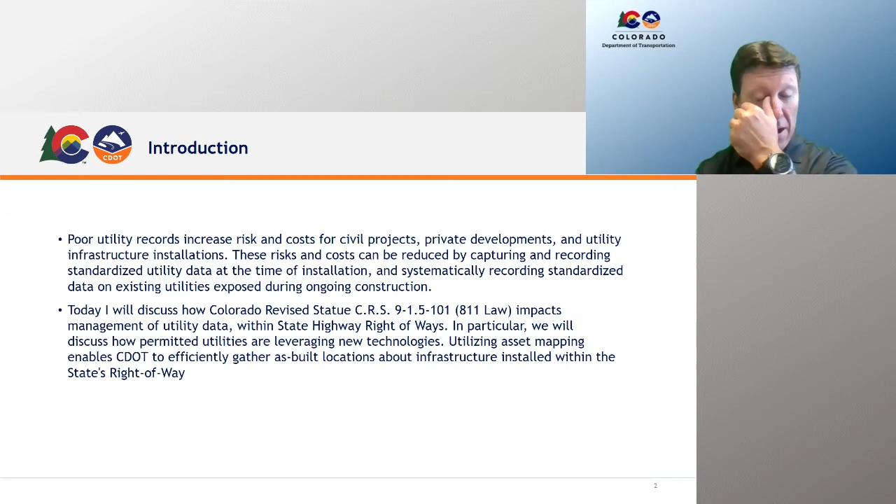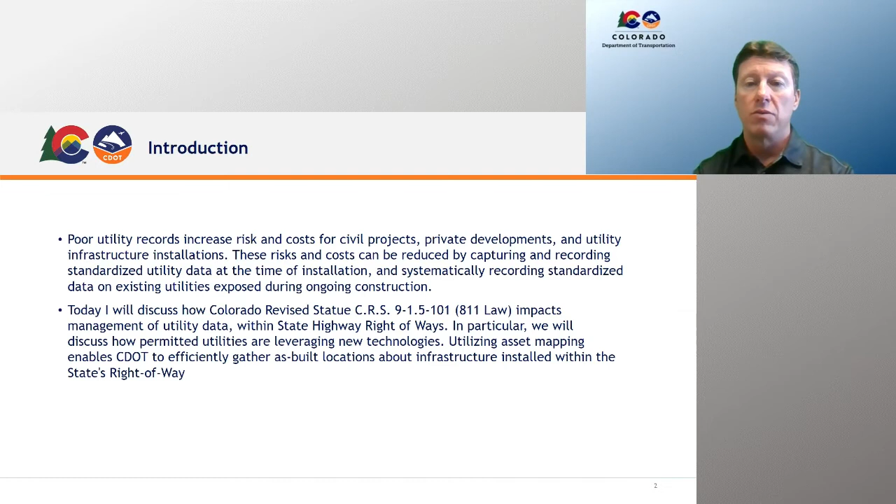Some of this is tied to our legislation that was passed in 2018. I'll talk high level about what our 811 law impacts - it does impact the utility data and how we manage basically the subsurface utilities and the records as we move forward with our state highway rights of way. I'll get into obviously what we're doing and how we're tied to this entire deliverable for utilities.

The goal here is to identify what our limits are and the expectations for our utility companies and permittees pulling permits, where they cross in and out of our right of way, what's expected. We'll go through some examples of what CDOT has put together for those requirements and mandates we now have for utility companies.

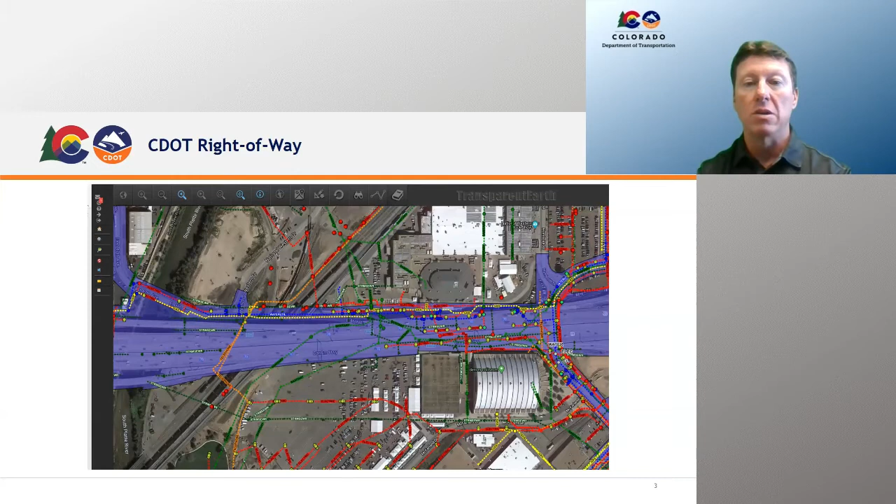So we look at that Transparent Earth PointMan package for CDOT as a good solution because of how we operate with a lot of the legacy systems we have, and trying to find a solution or build one.

We looked at building one internally, and it was really cost prohibitive, and the time it would take to develop an internal process, hardware, and workflow was going to be much heavier lift than what we could take on. So that's why we looked at off-the-shelf solutions for Colorado.

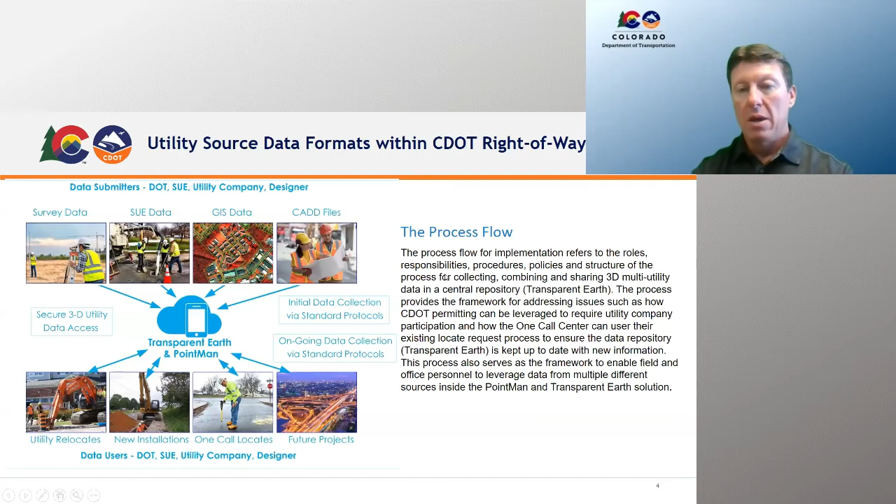When you look at Transparent Earth and PointMan for Colorado, we look at it really as a live subsurface utility engineering file: the existing and new utilities, the CAD data, drone imagery, and one call and excavation notifications.

A lot of states can tell you that one call excavation notifications is really a place where we find a lot of discrepancy between one call locates for excavation and the amount of data we've supplied to the contractors in our utility plans for construction.

There are differences there. Our goal with this process is to have a one-to-one relationship where our construction plans and the excavation locates match perfectly. I know that's unicorns and rainbows, but we really want to see that in the end.

We want our records to be that good that when we work on a pre-construction package, the excavator goes out and they're looking at it with the mobile app, or they're putting it in the cab of their excavator, and they can rely on the fact that the paint on the ground is the same as what's being delivered to them electronically.

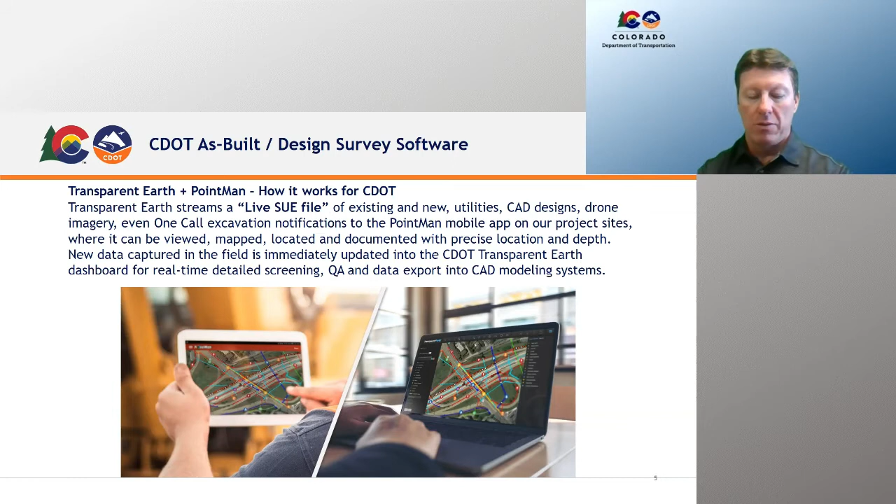It's a heavy lift, but that's the goal, that the records become very, very accurate horizontally and vertically. This is how Colorado is taking this on.

It takes the mobile app, it takes high accuracy GNSS receivers like the Trimble R10, the integration to make it simple enough to use for the non-surveyor, and that's part of the goal.

As a surveyor myself, I know how complicated it can be to survey with all this technology when things aren't working, how to troubleshoot all that stuff. So that's still in here, but the startup, integration, and corrections we were talking about.

With DA1 Trimble receivers and Catalyst correction systems, we want to make that as seamless as possible so that utility companies, their contractors, third-party inspectors, all of these folks working in our right-of-way have access to this technology, and it's user-friendly enough that they can see they should be collecting data at a higher accuracy just based on the simple integration.

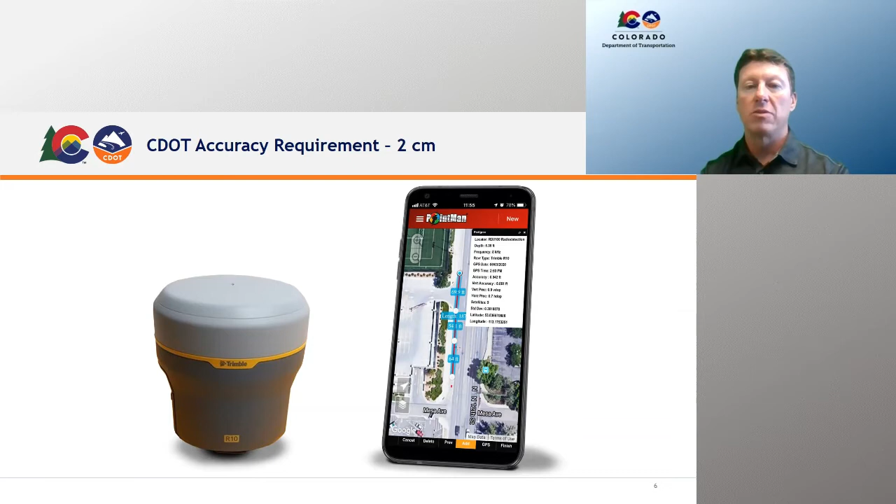We were able to collect the final elevation and grade because there was a little bit of change in the tracks. It actually came up a little bit, so our approach slabs into the concrete panels were rough. We were able to go out and collect down to centimeter level and see how much the pads had changed versus our approach, and then tell our maintenance folks how far the approach paving needed to go back to smooth out that crossing. That's just an as-built on the railroad side of things.

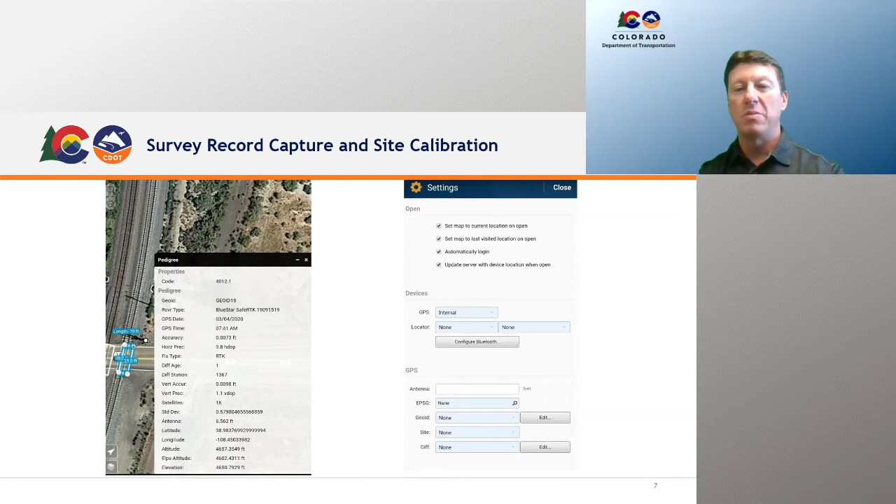So a lot of survey GPS stuff, but this is some of the stuff that we really look to for the GPS or GIS survey kind of hybrid system that I continue to talk about. We're not fully on the GIS side, we're not fully survey, but we're somewhere in this hybrid of survey GPS. It's more like a high accuracy GIS world.

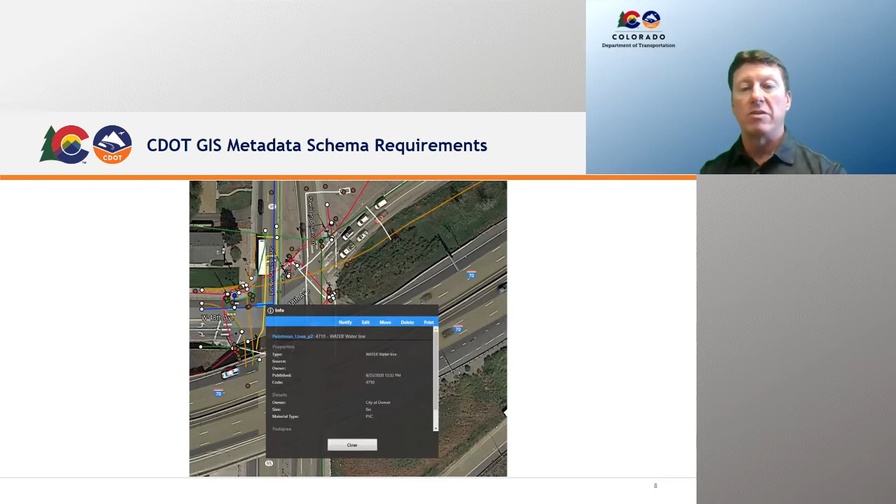So, more than that, we can also bring in shape files into our MicroStation environment for 3D modeling and clash detection, and that's where having northing, easting, and elevation tied to that is important to CDOT.

So with that, that's some of the background on CDOT and what our expectations are, the hardware and software that we've selected: ProStar, their solution with Point Man and Transparent Earth.

So how do we leverage all this within our right of way? We know that we have the tools. We now have to find a way to mandate or train or whatever we're going to do to get this out there so that it's leveraged. And that all starts with the utility permits on our side.

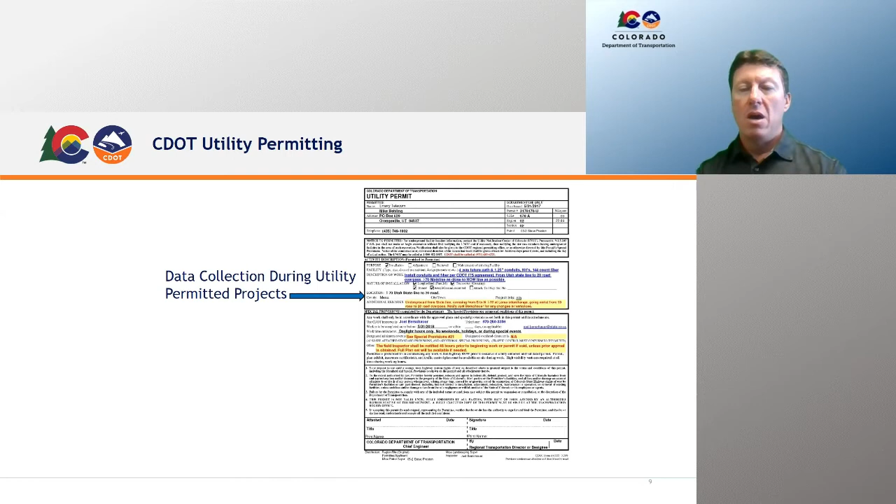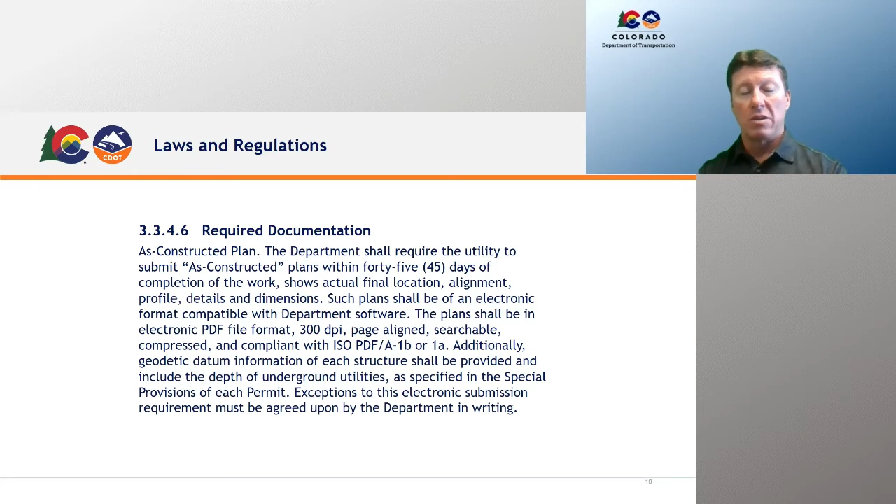Every utility installation within our highway right-of-way starts with the utility permit. So that permit for us means we need to make sure we have required documentation built into our code, that whenever that permit is executed, the contract between CDOT and the utility owner is clear that they are to provide us as-constructed plans, electronic as-built, and what that expectation is. So we have that in our system, in our utility accommodation code, and it's built into our permit terms and conditions and other notifications through the permit. I'll show you some examples of those here in just a second.

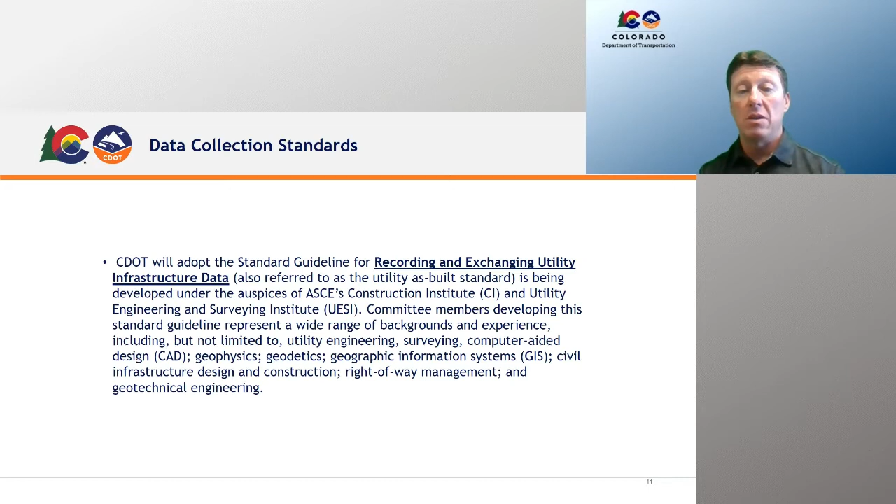One of the other things that's important for CDOT to follow is this new standard coming out of ASCE, the American Society of Civil Engineers, the Construction Institute, and the Utility Engineering and Surveying Institute. They've developed a standard guideline for recording and exchanging utility infrastructure data, or as-installed condition. This document is very important because it standardizes the expectation of what the as-built needs to be and what it needs to look like. There were committee members from a wide range of backgrounds and experience that provided guidance into this document, and I really think it's good information to use.

In our terms and conditions, we provide the expectation to the utility companies and their contractors, or third-party inspectors working on these projects for the utility companies, as to what the expectation is for data collection. For example, on the graph on the left, if it's an HDD installation, we need you to collect the right-of-way line, edge of pavement, and then subsequently the bore log to adjust the surface elevations down to wherever it's taken, probably center of the bore. Same with an auger bore - if you're in the bore pit and the receiving pit, here's the expectation for what we're looking for. That's provided to the permittee.

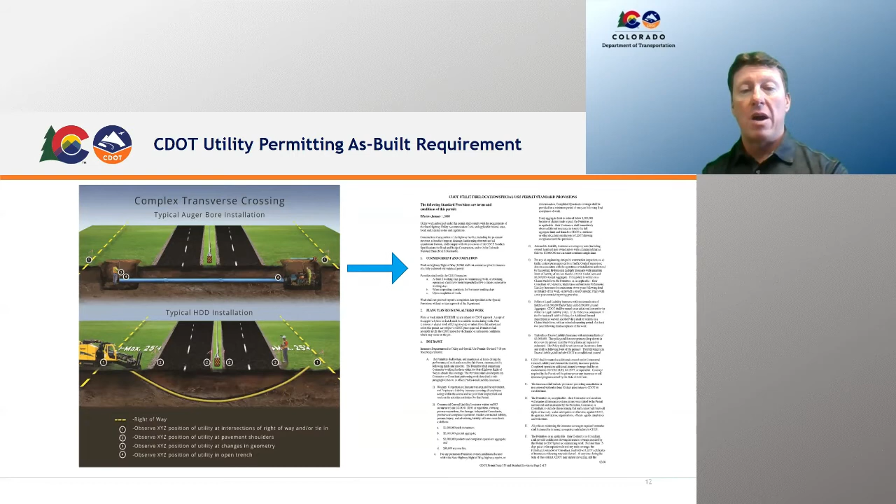This is also part of our as-constructed requirements for the utility companies - the as-constructed requirements for projections and coordinate systems, and positional accuracy specification.

We also provide the list of equipment that we will accept for pairing with the Point Man mobile app. For CDOT, we provide the Point Man mobile app free of charge to those pulling a permit from CDOT. We provide in this as-constructed guidance a link to where they sign up, and a short video showing them how to get started and get logged into the CDOT environment. Once they're signed up and logged in, when they're collecting data in that environment, it all streams through that user ID into our environment, so there's almost zero manual effort needed when it comes to supplying their observations into our database.

What's helpful for us is when we require the personal ID, we can see who it came from. So if, for example, you're an energy company with 6 subcontractors or prime contractors working on a project, all the users using the mobile application need an ID and login. We're up to almost 200 users in our system right now with all these contractors working for the utility companies, which is really important because I can drill down and search through the database in Transparent Earth to see who provided the data, when, and how.

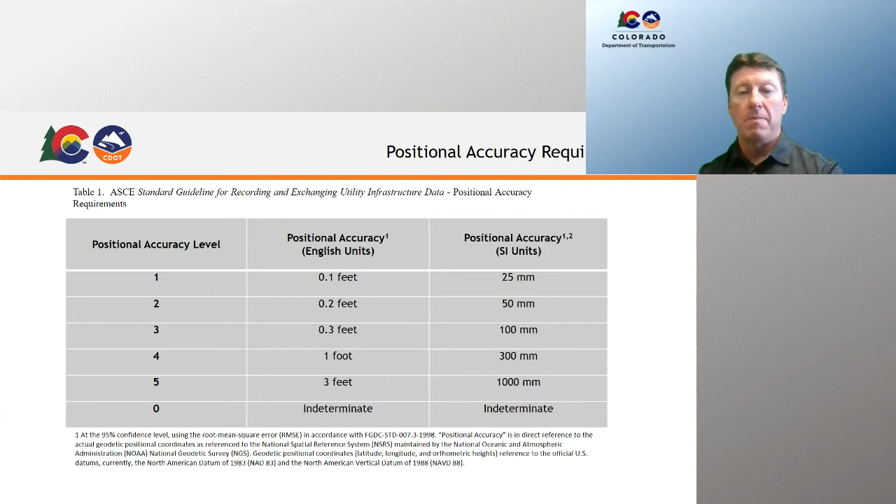2/10 of a foot accuracy for our positions. And what's different in Colorado is we don't require certification by a PE or PLS for our data. Instead, we'd rather see positional accuracy tied to the observation and the survey record generated out of Point Man. Once that's provided, maybe it's a 3 or a 4. We're just looking for the quality of the record in our system, and whether we can use it and leverage it for design later, or do we need to spend money to update that record to a higher level of accuracy. I'll get to why that's important based on our SUE law in just a little bit.

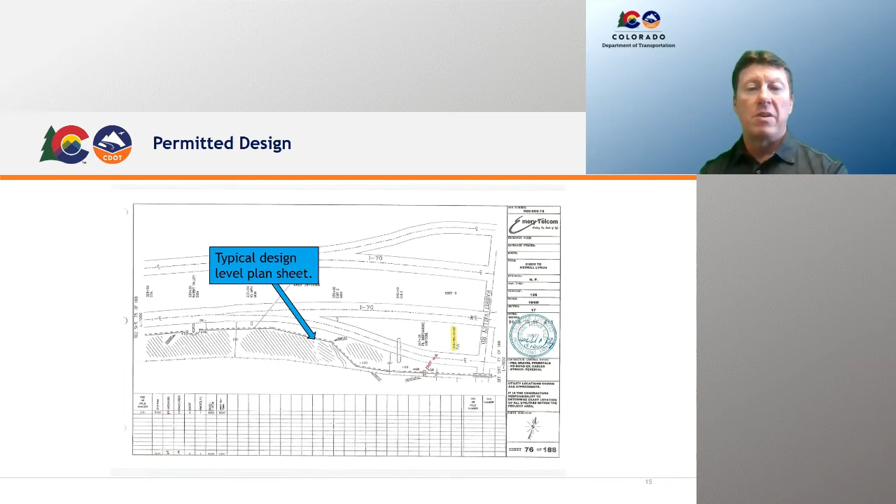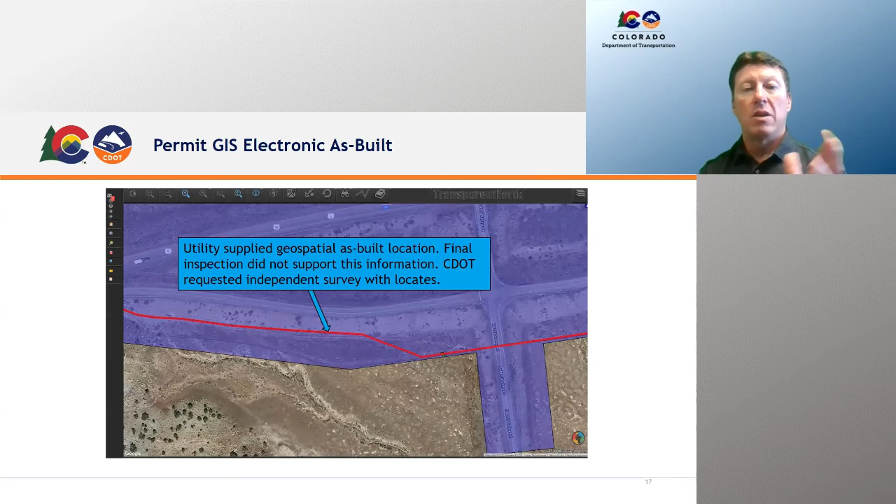When it comes to permitting, this is an example of why we're pushing for more of this data to come in through our new system. Previously a permitted design looked like this - just a simple telecom. They identified where they were going to put this line in our right-of-way, stamped it, certified it, provided us an electronic PDF version, said yep, this is where it's at, we're good with that, and also provided an electronic GIS file - they provided a shape file. The red line is what we were given by the utility company.

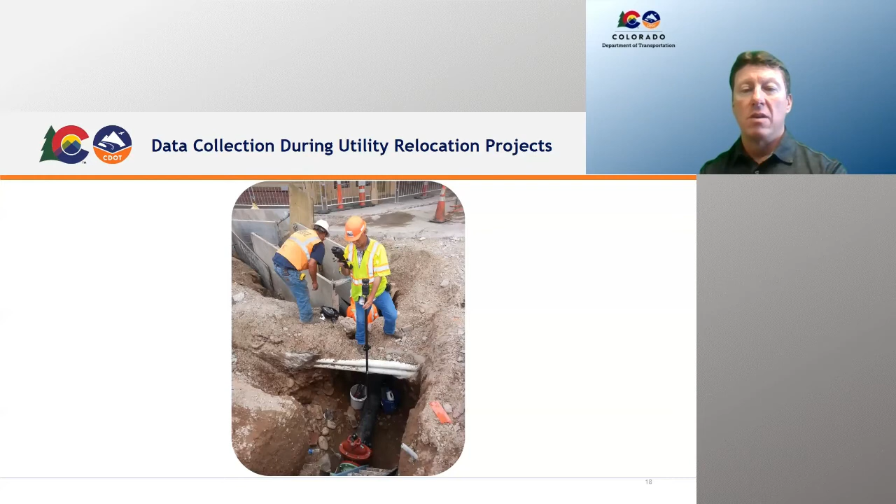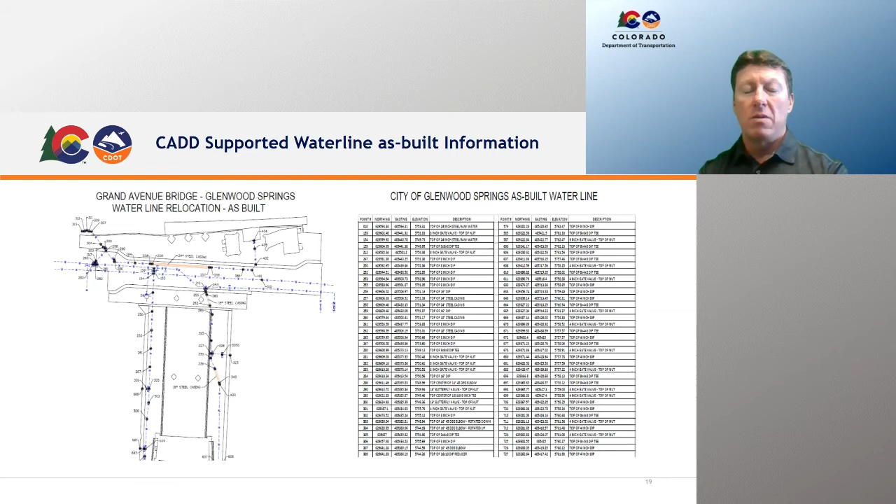And lo and behold, we had some issues with that. Before we'd implemented data collection with an inspector and third-party inspector, we ended up with CAD data that looks like this that never made it into our database, and so we struggled with some of our as-builts in the past.

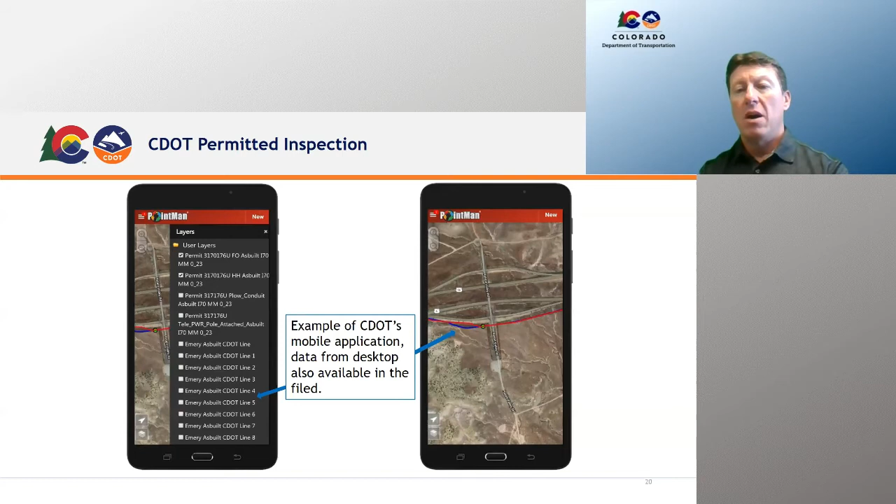So what we've implemented now is our inspectors are out in the field rather than the old method of just the data collector and the survey antenna. It's more interactive now - we're using the mobile app and the GNSS receiver. As you can barely see, there's a blue line showing up that was captured in the field when the CDOT inspector went out. They noticed a different line of disturbance in this area, so they surveyed it in, and questions came up about where it was actually installed. Lo and behold, the blue line is where the telecom company actually physically put the line in the field. It was never conveyed back to the office that it needed to be corrected. So what happened was the designer pushed out the red design, said nothing changed in the field - which everybody knows is almost unrealistic. We know things always change in the field.

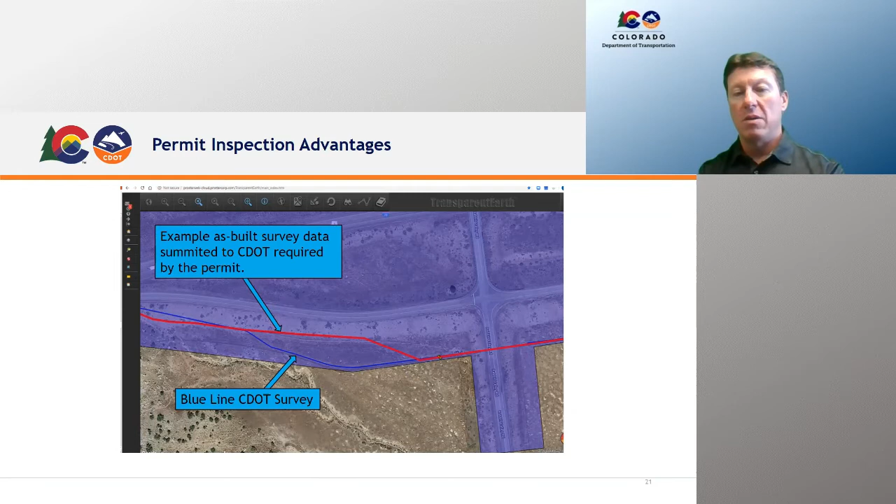So this gives us more leverage in the field to see what's happening. We're actually now asking for the design-level electronic files to be provided so they can be published to the mobile side, and our inspectors can then adjust, or on the fly resurvey and start to document where things are changing through construction observation.

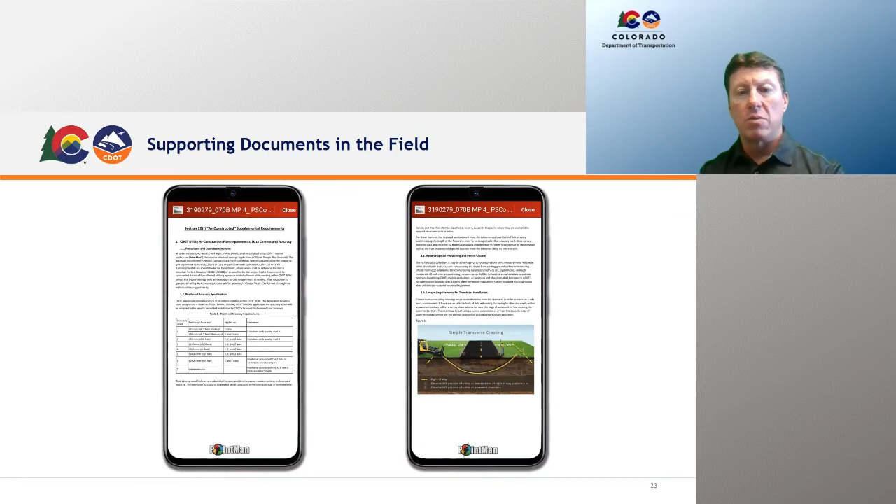That's where we embed the utility permit information into the project geospatially, so it's out there with the contractor, third parties, and third-party inspectors and everybody else. On the right-hand side we have a link to it, and within the mobile app you can pull up the permit, the as-constructed requirements, and the typical information as far as what needs to be collected. Also in there are the plans provided to us by the utility company as their design, so we can look at that. If something starts to vary during our construction inspection, we can refer back to the plans provided, and then bring up more questions if needed.

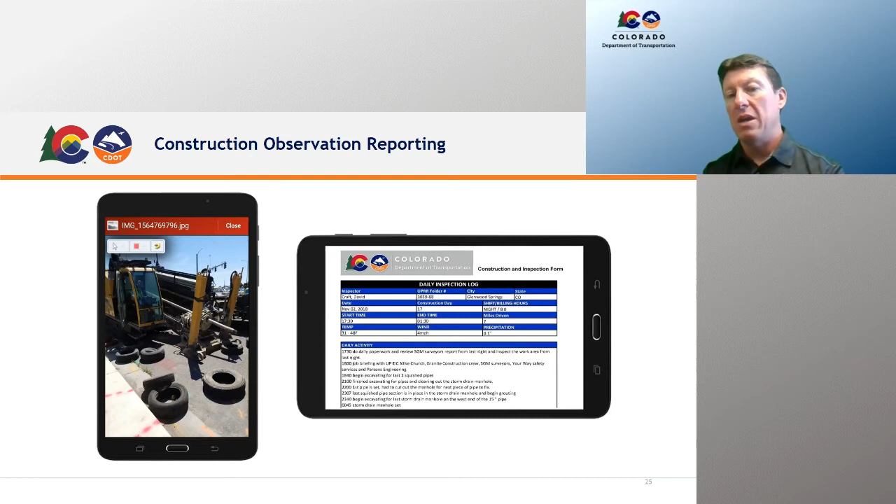Furthermore, we can also document it with our construction and inspection form embedded into the mobile app. We have a daily observation form with photos and sketches embedded within that form. The daily logs are extremely important to document how the installation was going, what happened from day to day, to capture a good record of everything. What's nice is it's geospatially referenced - all this is in there for future reference, whether it's mobile or office. It is captured there.

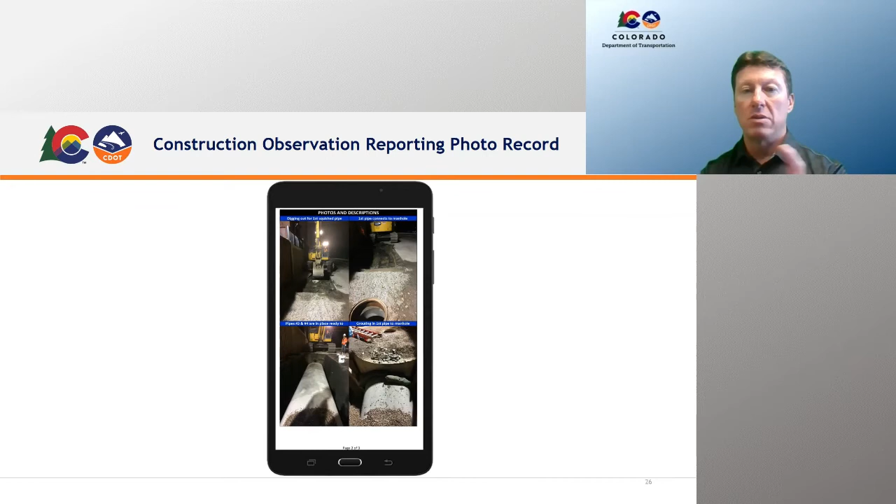On the office side in Transparent Earth, we can search quickly through the database and see either by user or by date, or whatever it might be.

Looking at the subsurface utility engineering side of things for CDOT, this is on the pre-construction side. Our requirements are pretty specific: we have a SUE notification that goes out, and our engineers of record have to be competent in utility construction, survey, and geophysics. They have to work to provide a quality level B product based on ASCE 38 standards, whether that's 02 or 38-22, doesn't matter. Our law is specific to 38, doesn't differentiate, it's whatever the current version is. So yes, a quality level B package has to be attempted unless there's some reasonable rationale why they couldn't get there.

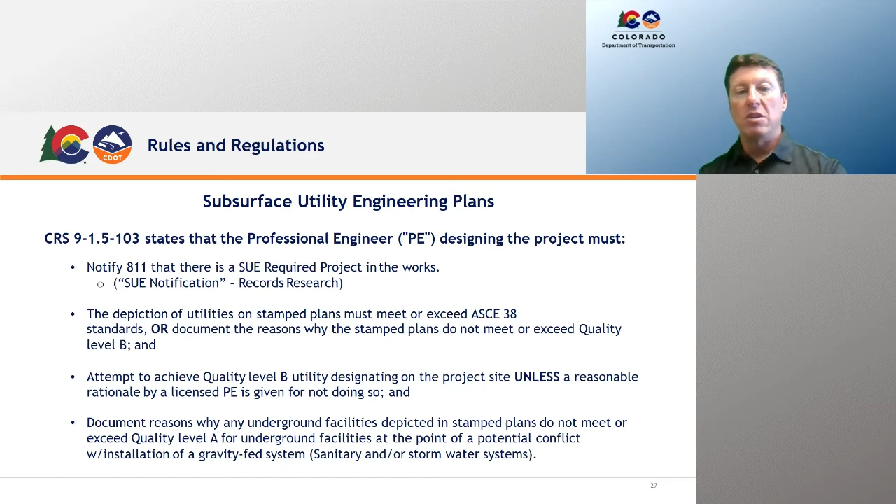What we see as that reasonable rationale from our certifications is poor quality records. The records they start with make it almost impossible sometimes to use every geophysical tool in the book to even find the utility. There are issues with the records, and that's where we're focused on providing better records for our SUE vendors in order for them to achieve a higher quality level on future projects.

One nuance with our Colorado law is that all underground utilities must be electronically locatable when installed. This is a good thing, even laterals, anything going in the ground has to be electronically locatable. There's been guidance put out by our safety commission, which is new, a 15-member safety commission that implements rulemaking based on the law, and they've defined electronically locatable. I'm also working with that safety commission to define survey accuracy and tolerances for electronically locatable, as well as tracer wire, marker balls, and other things. That's still ongoing.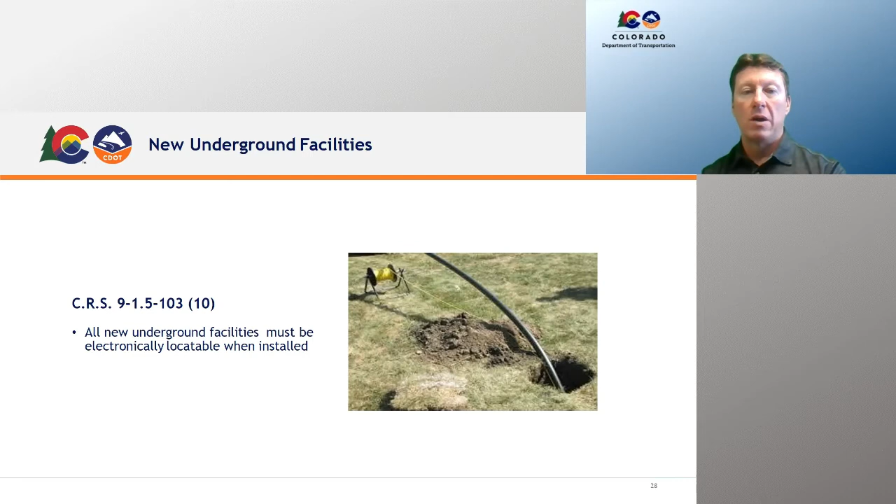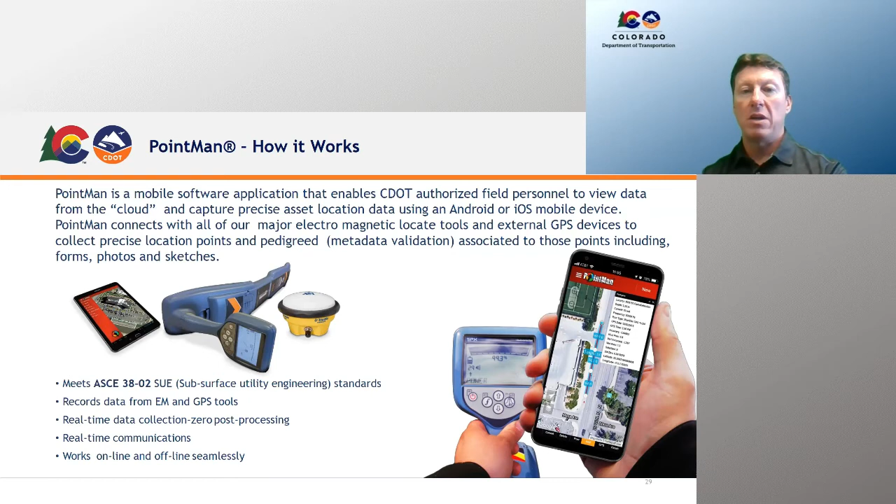Our SUE vendors really seem to like the ability to publish SUE information right into Transparent Earth, the PointMan, the EM locator, and the GPS antenna. Paige spoke to that. This is actual data on an intersection project that was published directly from the SUE investigation into our system. The record on the right-hand side spells out all the survey information, but also the EM locator information and how they came to a quality level B designation, which is on there.

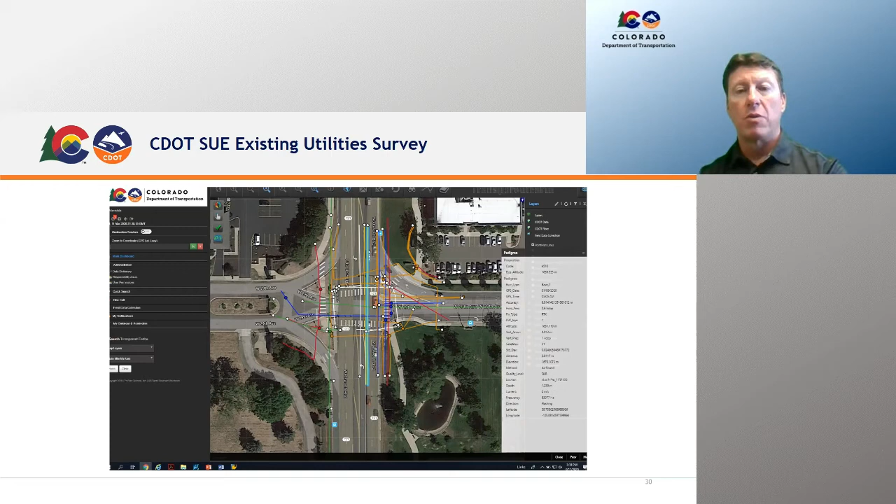Some SUE vendors will not designate it in the field. They'll go back and compare it to records, and then they'll assign it later. But that can still come back into our system, and we still have a snapshot in time of what that subsurface utility data looked like. On the mobile app side, this is the same data, just out in the field if need be.

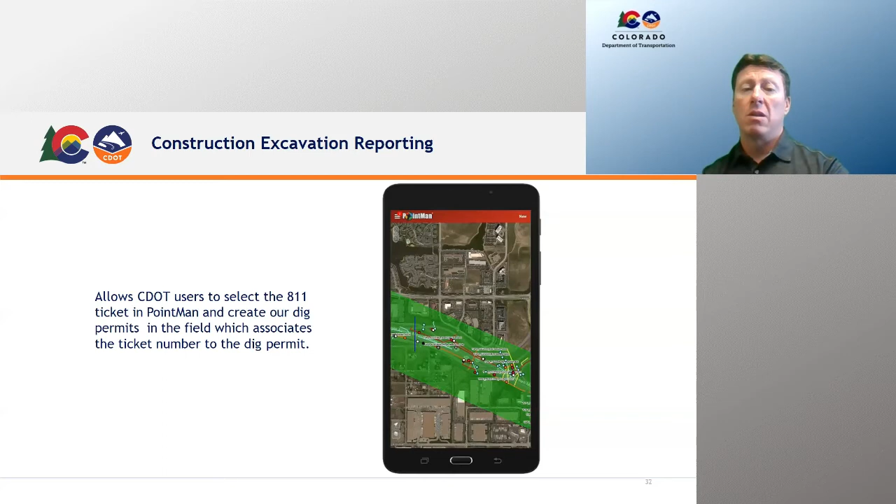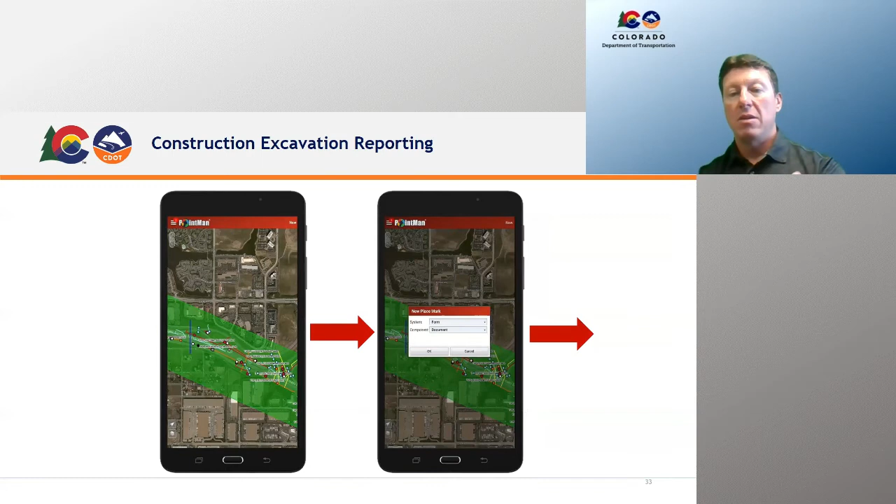Paige Tucker touched on the 811 integration. CDOT really finds a lot of value in this. In fact, I was just meeting with a telecom last week about how they want to mandate their locate vendors. When the one-call tickets come in, they're going to track them through PointMan. When they do their locates, they're going to use the EM locator paired with a GPS antenna to capture that data and provide it into their system, so they start capturing better records, and then we can share that data. So there's that collaboration that's quite huge between the utility companies, their locators, the agency, and this again leveraging the technology.

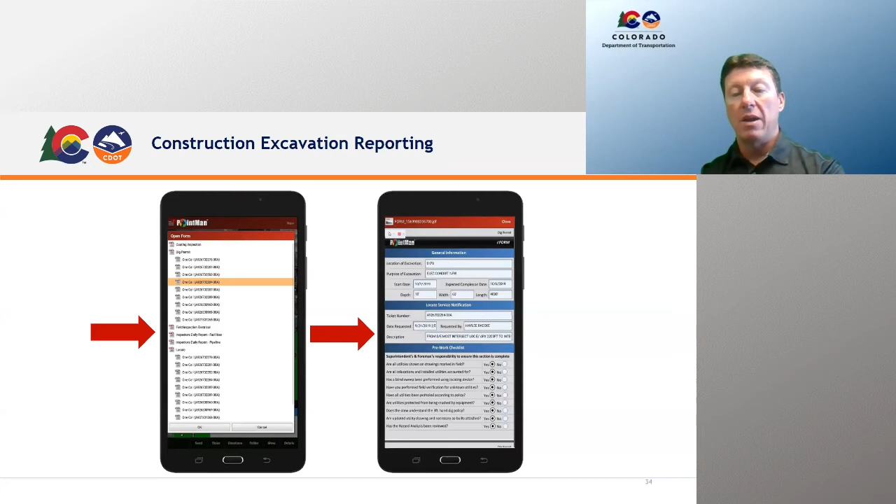This is another example of the locate ticket, and then our locate form that allows those investigating that ticket access into and pull the data out of the one-call database, which auto-populates the form.

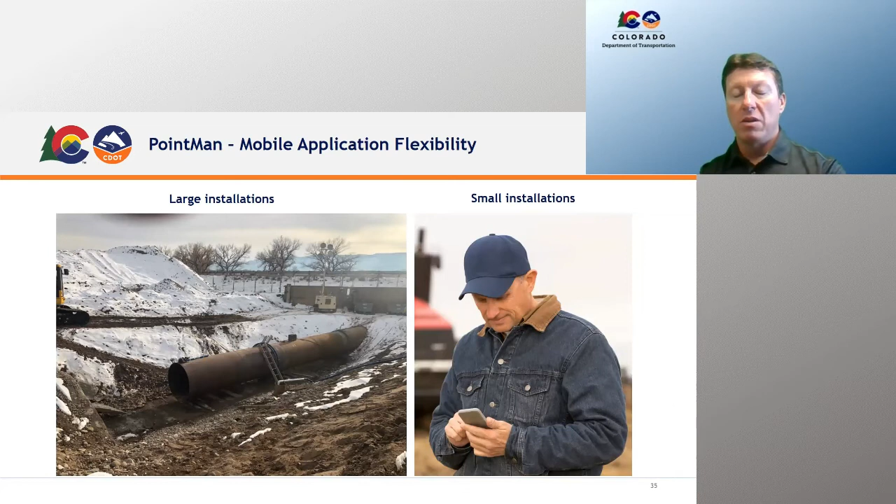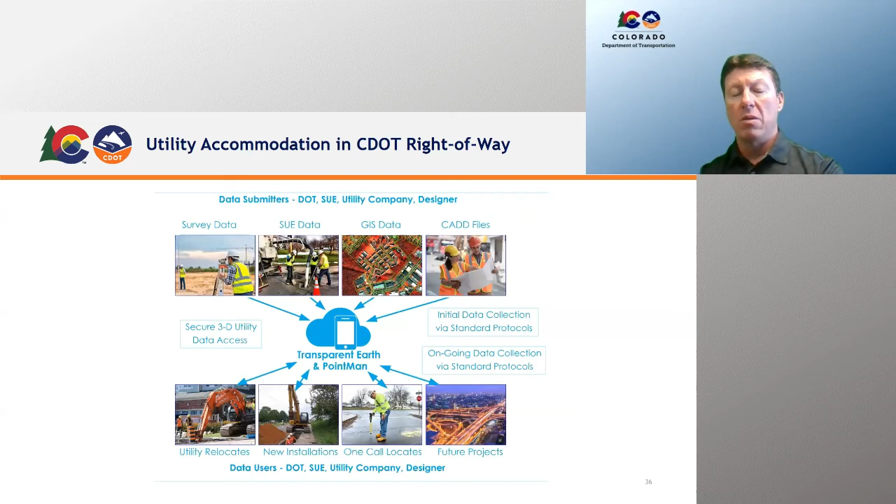Getting back to what CDOT's trying to accomplish: from large installations to small installations, we're going to leverage this technology to capture all the data in one location, with one mobile device out in the field, leveraging that mobile application and our database. Over time, we do feel our records funneling into one location will be advantageous, and our costs coming down for SUE investigations will offset the cost of paying for software like this.

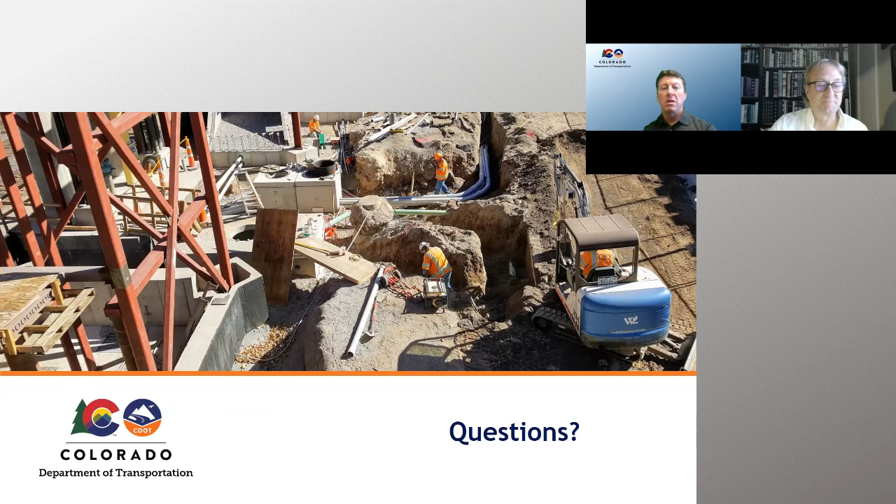So with that, I appreciate the time today to showcase what Colorado's up to, and we'll take questions.

Thank you, Rob, for giving our lunchtime keynote on what lies beneath. I'm always impressed with what's going on in Colorado. We're working on this in our state too, but we got questions from the attendees here.

One question is a scenario: during the layout of a new utility or construction of a new section of highway in a pre-populated or high-density area of subsurface utilities, what percentage of investment typically goes into locating the subsurface utilities, and how much would this vary from, say, a greenfield project?

Well, that's a really tough question, but I think when you look at how Colorado's breaking this out, we look at pre-construction and construction. Our pre-construction budget for SUE, subsurface utility investigation, we set a budget between 0.5% and 3%, actually, is where we're seeing our subsurface utility investigation budget based on scope of work. So we develop our plans, put it out to bid, and then we also roll into our construction management cycle, that is another budget item to where we have construction management, utility inspection, as-builting. That's just for CDOT projects. The utility permitting side is obviously different, but we have two ways of approaching the data collection. The cost associated with SUE, again, is within the national range averages, and then we have a whole other range for construction management that we budget for early on to try and capture the data. So it's really a utility process management lifecycle.